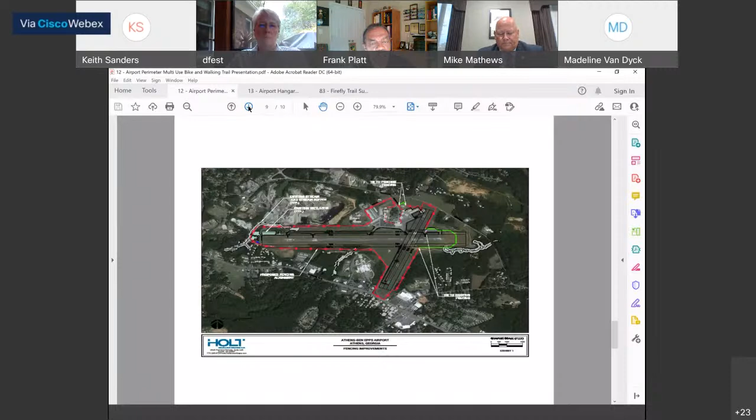Any questions? Thank you, Mike. Any questions from the committee? Please raise your hand. Andrea.

I have a couple questions. One is about the distance all the way around. Do you have the total distance that the trail would be? Yes, it's roughly about 24 to 27,000 linear feet.

Okay. And in the budget materials, I haven't reviewed all that before tonight, does it distinguish between the cost for what would essentially be double track adjacent to the fence and the cost of the fence itself? Say again? Does the budget differentiate in the construction cost between the cost of the fencing materials and the cost of construction of the double track?

No, this is just the track itself. The fencing materials would be taken care of in our fencing project with the FAA. So this cost I showed you has nothing to do with fencing whatsoever. It's just the track itself.

Jeff? Yeah, I have two questions. One, does the FAA really let you paint a sidewalk next to an active runway that looks like a runway?

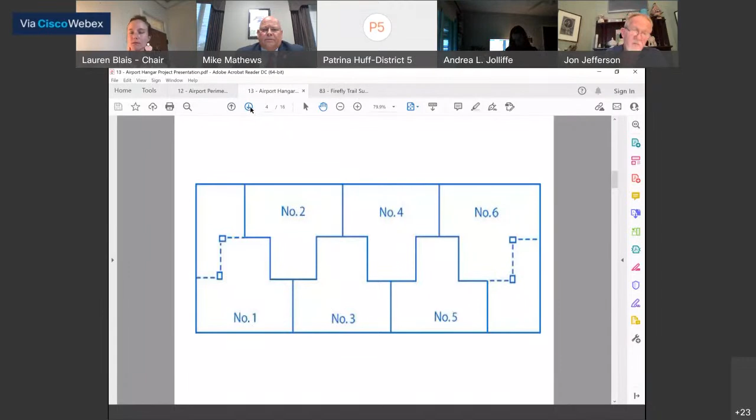When we talk about T hangars, this is what a T hangar looks like. They're in the shape of a T. The airplane's wings go in the larger section, and the tail section goes in the smaller section. This is what they call a nested T hangar.

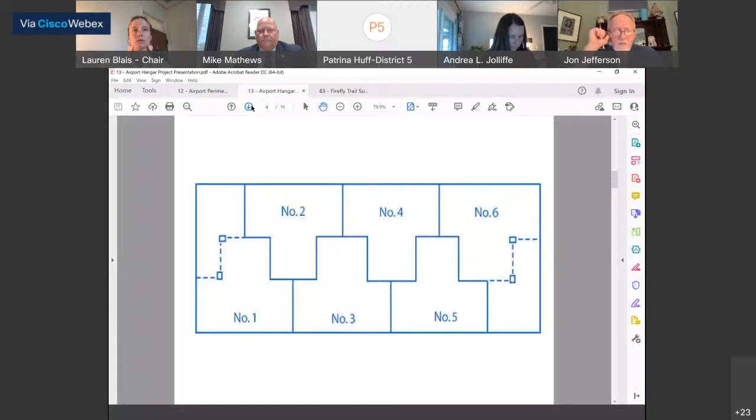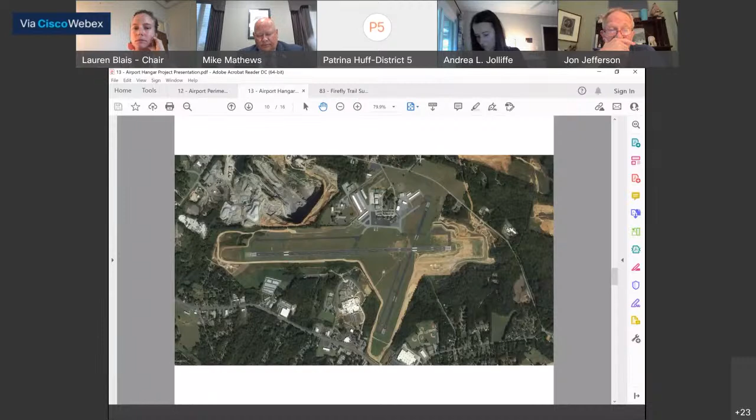This gives you an idea how we're laid out with our hangars. You see the rows - those are box or T hangars. They've got different designs, built in different years, and we have room for several more hangars to be built as well.

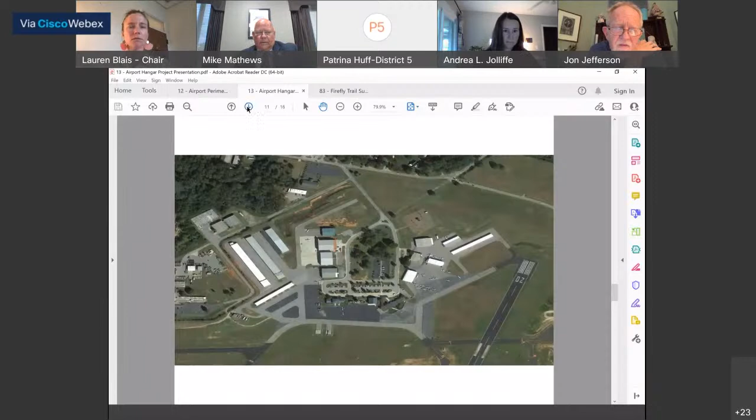So let me talk about the purpose of the project. The purpose is to bring additional revenue to the Athens-Clarke County General Fund and also the airport. The project will allow the airport to construct individual hangars used by based aircraft owners to rent from the airport for their aircraft. The project will add revenue through fuel sales, estimated about $75,000 annually, depending on the type of aircraft that goes in it.

The project will also add revenue to the Athens-Clarke County General Fund from local property tax. Again, depending on what kind of aircraft goes in it, it's estimated anywhere from $50,000 to $100,000 annually going into the general fund.

A lot of people think most all revenue comes back to the airport - our hangar rental, our fuel sales - because we're an enterprise fund. But one thing the FAA doesn't mandate is that property tax go back to the airport. Property tax at all airports, I believe, goes to the county or the city, which helps the general fund. Don't hold me to this, but I think it's somewhere in the neighborhood of $500,000 - I don't think it's over that yet - that's the total property tax that goes into the general fund from the airport annually. I may be a little off, up or down.

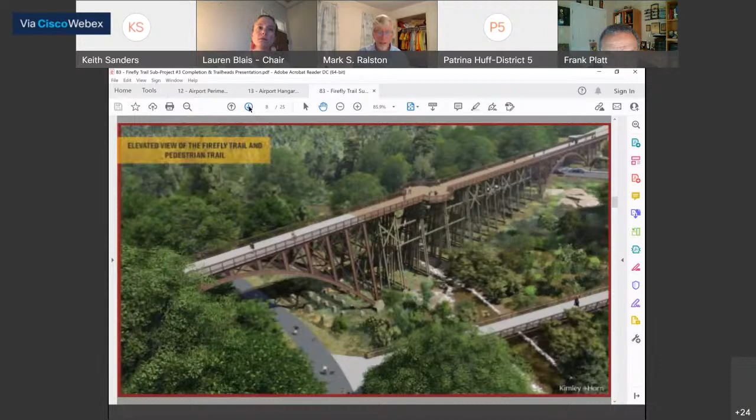The trail has a lot of benefits, and one of those is economic. An economic impact estimate from the Georgia Tech study, completed in 2016 for the Georgia Department of Transportation, showed that when all 39 miles are finished, the trail will attract about 1.13 million users a year and have a regional economic impact of about 14.7 million annually. Just construction alone will generate 158 jobs across our region, the study estimates.

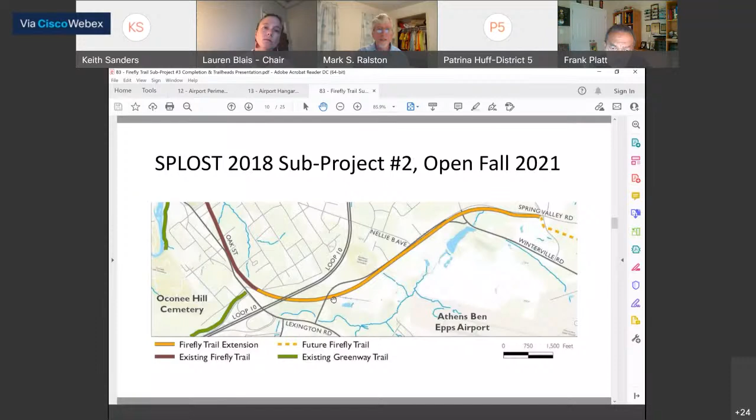Of course, for the full scope of the trail's benefits to be realized, the trail has to be completed. Illustrated in this map by the solid orange line is the trail segment that will open on October 1. This map shows the yet to be completed subproject 3, which is what we're here tonight about, extending some 3.4 miles from the intersection of Hancock Road and Spring Valley Road all the way to Winterville's 5 Points.

Although this was included in the SPLOST funds from 2018, this final trail segment faces a funding shortfall. The amount included in the previous SPLOST isn't enough to finish the trail, particularly not in the long-lasting concrete surface that voters expect, much less to develop facilities such as parking or restrooms, which are very important to trail users. Contributing to this gap are higher than expected costs on the Trail Creek Bridge, and also a bridge that had to be installed over a future access ramp from Lexington Road to Outer Loop 10.

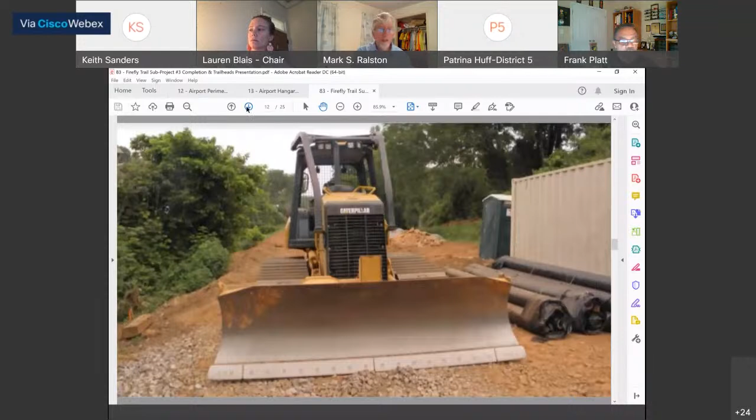Now, county leaders have committed to completing the trail. The question before the advisory committee is when. If funds aren't allocated from this TSPLOST, it will really be several years before the next TSPLOST or SPLOST might close the gap. During that time, the residents of our county just won't receive the trail's full health, safety, and recreational benefits.

This is a great view showing part of the newest trail segment, approaching Hancock Road along Spring Valley Road, near the Hallmark Mobile Home Park. Especially for nearby neighborhoods, the Firefly Trail promises to promote equity in health, safety, and infrastructure investment. But fulfilling that promise requires having full connectivity between Athens and Winterville. We think it's best to finish the trail now and realize its full potential sooner rather than later.

So as I touched on a moment ago, besides completing the trail, the proposal includes some necessary amenities. One of those will be this trailhead facility located adjacent to Ranick Road, as shown in the concept graphic here.

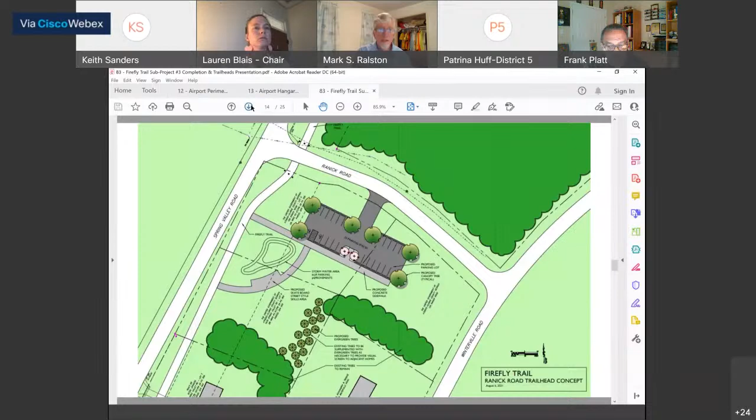And also here, which is at the intersection of Winterville Road and Spring Valley Roads, where the trail will connect to the future Rock Hill Quarry Park. That's Winterville Road on your left, and then making a right angle turn and going off to the right towards the airport.

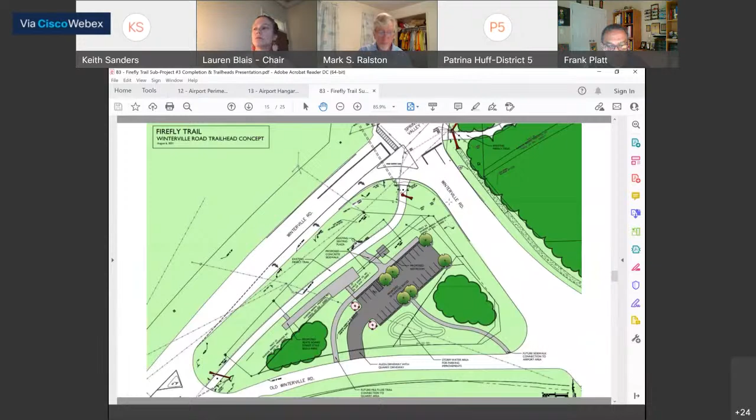Now the trailheads will include parking areas such as this example on the North Oconee River Greenway.

As well as restroom facilities. This is a new structure at Ben Burton Park.

We're also proposing to include a small skate skills area at each of the trailheads, similar to this example, which is at Vogel Creek Park in Texas. These kinds of areas will help diversify the Firefly Trail's user base.

Voters in the TSPLOST sales tax initiatives have made it clear that they expect the final segment to be completed with the same high quality, cost-effective concrete surface you see here. This has a life expectancy of about 50 years, which makes it an ideal surface for trails like this. Our community is making a huge investment in the Firefly Trail, and this public resource will return that investment many times over if we can maximize the number of people who are able to use it.

Without the TSPLOST funding, Athens-Clarke County might have to use crushed stone or compacted soils for many years in portions of this final section. While these surfaces are inexpensive initially, they require ongoing maintenance, which can be expensive over time. Otherwise, they wind up looking like this, and they're useful only to the most hardy and adventurous of trail users.

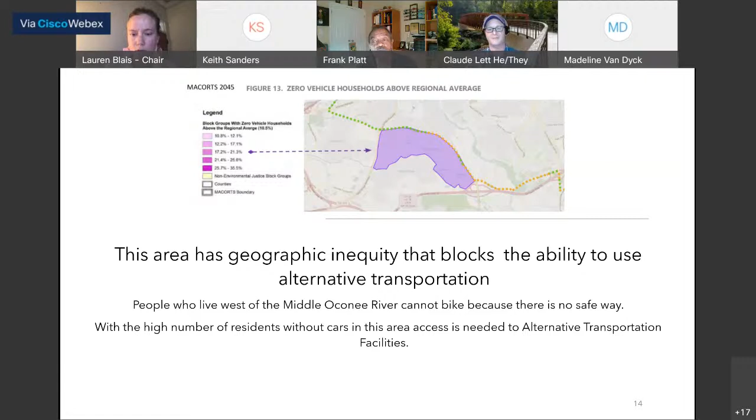I want to show this image again, of the 0 vehicle households above the regional average. Remember, no benefits of SPLOST or TSPLOST have ever been realized by this part of Athens. This bridge makes a big change in the equity of this area, giving these 0 vehicle families access to bus routes and more employment opportunities, because now they can get to the other side of the river to the Beechwood area and all the businesses over there. It increases their options significantly.

The 4,000 residents of the Timothy Road corridor gain access to public options across the river, such as the library and middle and senior high schools, so kids can walk or bike to school. There are also 5 major churches off of Timothy that would benefit, with members able to walk or bike to services or visit the historic landmarks we spoke about earlier. And when people use cars less with more activity in this area, that means fewer cars and less pollution.

Fewer cars then subsequently means better roads. More alternative transportation leads to less vehicle miles traveled and less traffic congestion, and one main reason is because this project reduces time spent traveling in vehicles. By providing a walking and biking option, you significantly lessen the automotive footprint. We've seen it over and over again.

This project turns a 5-mile drive, currently the only way to make the trip, into not only a short walk or bike trip from one neighborhood over the bridge to another, but also incentivizes walking or biking because of how easy it would be, by providing the destination for them to go to.

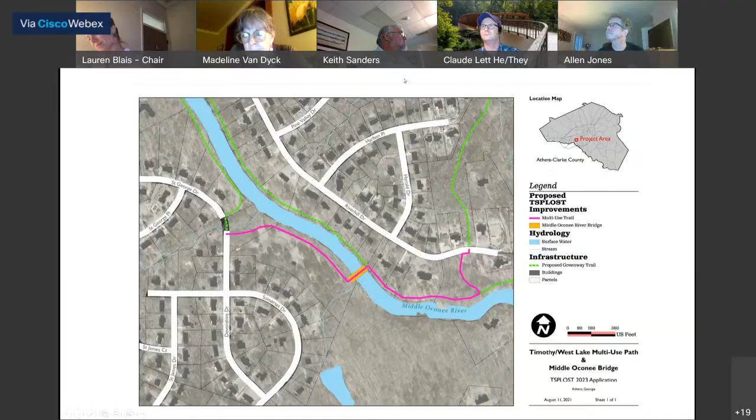Claude, given the existing infrastructure on both sides of the river, is there a temporizing bridge that would allow some beginning of flow across both sides that could be considered, or do we need to go full bore with metal and concrete? From what we understand, there were no alternative construction options we could be considering.

Allen or Keith, any thoughts on that? It's Allen, I'll jump in. We were approached to assist at one of our open houses with this project. We used the standards for Greenway trails to guide the pricing, and that's the bridge featured in the background on the screen, which has also been used a couple times. That's the standard we use for all of our trails, and it's probably about the least cost bridge for this area and length of span, to be able to get out of the river buffers with the foundations and have that long a span. It's actually one of the longest spanning pedestrian bridges in the area.

I believe, just out of curiosity from your map, where the bridge lands on the River Hill side, it lands on Athens-Clarke County owned property. Out of curiosity, why not take the trail right up to River Hill Drive? I think it was an ADA concern because of the rise of the land. Okay, I don't know the property at all. Again, the precise location could be changed. John, topography for that linear piece is very, very steep. Yeah, okay, that makes sense.

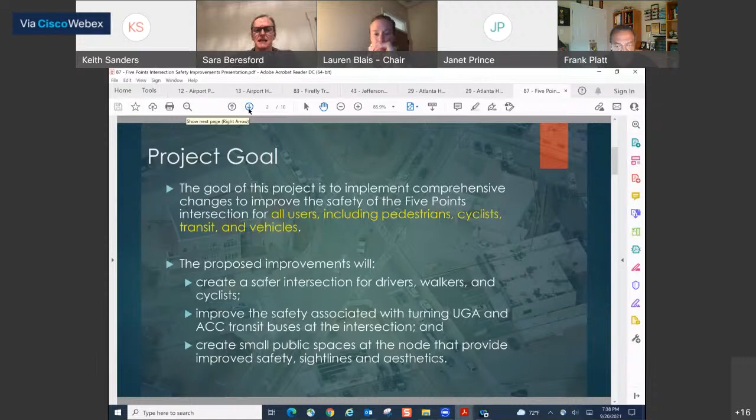So what does that actually mean? When we put this proposal together, we worked with a landscape architect to come up with a generalized set of drawings about what types of changes could be implemented to improve this intersection. So although I provide this sketch, it is by no means how this project would necessarily look. That would be something a user group would determine down the road. But this gives a general sense for the types of things that could happen, including relocating existing crosswalks to shorten and improve pedestrian walk time, converting existing strain poles to mast arms, improving pedestrian and wheelchair ramps, improving pedestrian refuges at corners, evaluating and improving curb radii at key corners of the intersection, updating signal control and timing, and overall aiming to reduce car, pedestrian, and bike conflict points. Next slide.

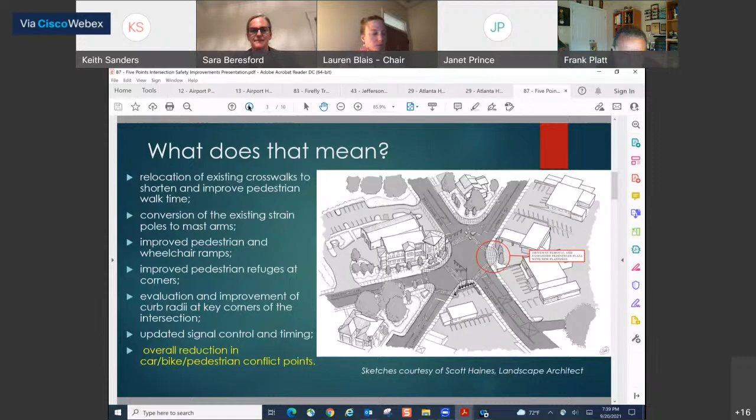So why is this important? Why this intersection? This intersection is a major hub of transportation and commercial activity with multimodal activity that serves all of Athens and surrounding communities. There are safety concerns, a lot of accidents, a lot of near misses that traffic data doesn't capture, a nearby school, and a high volume of UGA student drivers. As many of you use this intersection probably on a daily basis, you know it has terrible geometry, unusually long crosswalks, irregular abutting properties, and corners, driveways, and curb cuts that are inside the intersection itself. Next slide.

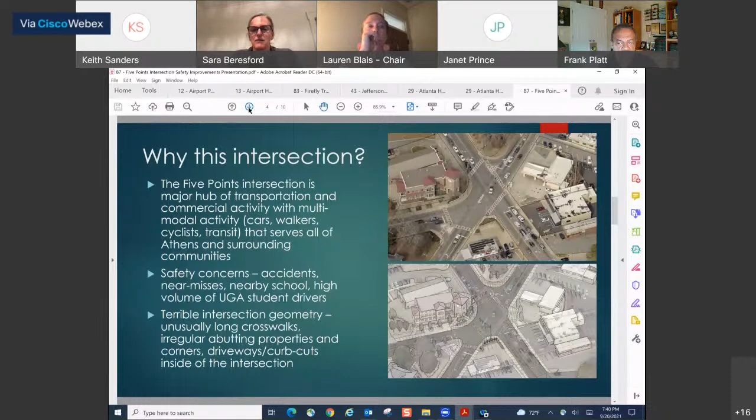So the larger picture of these types of intersections is that they're known to be difficult. Five-pointed intersections are notoriously challenging around the country, but some of the creative solutions other communities have used, like roundabouts or transforming the intersection, are not feasible due to existing buildings and infrastructure. We have the additional challenge that Milledge Avenue is a state highway.

The ACC Department of Transportation and Public Works has also identified this intersection as an area of concern and has already implemented some measures, such as signal timing adjustments, to improve safety. These proposed improvements are consistent with goals outlined in the Athens in Motion plan. Next slide.

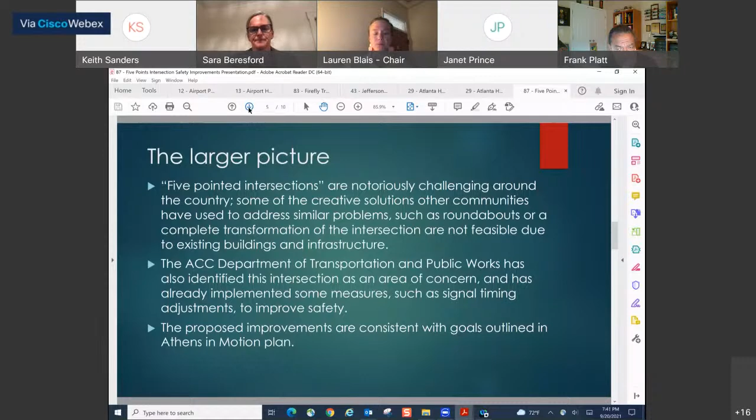So how does this proposal support TSPLOST program goals and selection criteria? First, the economic prosperity goal provides capital expenses needed to achieve planned action items. By improving the safety of this node, the proposed project helps Athens move towards several goals identified by Athens in Motion, including connectivity, equity, more users, and implementation, providing a variety of funding mechanisms to finance and maintain the network. It also touches on social well-being by improving safe and equitable access to public transportation facilities, including transit, crosswalks, sidewalks, and cyclists. And environment supports other transportation-related capital expenses needed to achieve action items identified in previously adopted plans. Next slide.

Specifically, this addresses the selection criteria, promoting the goal of improving equitability of capital improvements throughout the community by increasing safety and access for multiple modes of transportation for all users of an intersection that serves all of Athens. It promotes the upgrade and continued use of alternative transportation facilities with safer bike lanes, crosswalks, sidewalks, and transit access, and promotes health and safety, improving safety for pedestrians and cyclists in this area. Next slide.

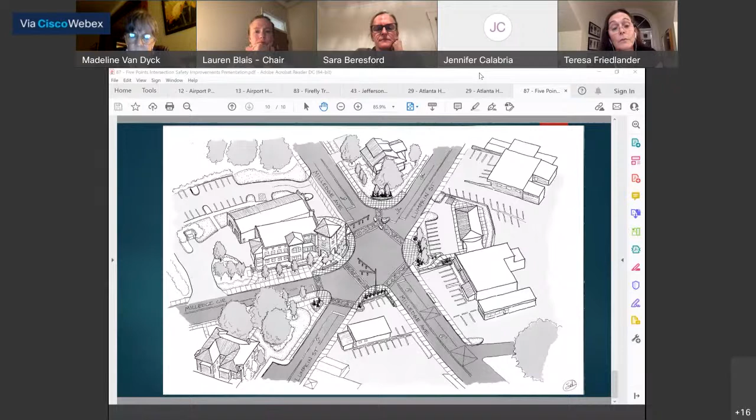I just want to share a couple of observations. Recently I've been going through that intersection a lot, and my biggest observation is that pedestrians are really scared to cross, even at the flashing beacon locations. They press the button, the thing starts flashing, and then they just hang back waiting until they think the car is coming or not going to kill them. That's an educational problem we need to solve countywide. But looking at traffic in that intersection, it's always congested—I haven't been through it one time when it hasn't been congested, and nothing moves fast. I don't see speeding as a problem here. I see the problem as elevating the status of the pedestrian and making pedestrians much more visible. I like how you've configured those crossings there. I think that's a better approach to getting people from point A to point B, and it eliminates those really long runs, which are terrible. So anyway, that's really all I wanted to say. I think it's a good project, and thank you for bringing it to us. Thank you.

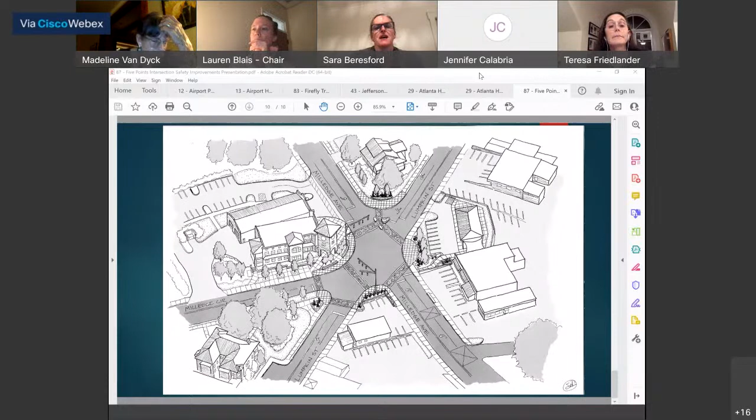This is a case where I've always felt congested traffic isn't necessarily bad from a non-car user standpoint. The cars aren't going that slowly, but visibility is the real issue. What the sketch doesn't capture well is the Lumpkin rise—if you're driving on Lumpkin coming from the UGA track, and catch it when there's not much traffic, visibility is really poor. The way you cross the 5 Points intersection on Lumpkin Street is sketchy for all users, especially with any speed involved. But yeah, it's all about visibility.

We have a challenge in Athens in general. You mentioned the education piece, which I think is really important. I have one teenage driver in my house and another on the way, and I always tell them: remember, we get about 10,000 freshmen every year coming to this town driving their cars. That's a lot of teenage drivers we're adding. So that makes the education piece challenging, because you have a lot of young and distracted drivers. So texting, yes.

I was recently rear-ended at this intersection, and I've also been in a bike wreck here where I clipped my bike pedal on the curb at the Golden Pantry. But it was great because two weeks later there was an apron there, so it's now flush and my problem was solved. That never happens in transportation world, where two weeks later your problem's solved. I was fine, just embarrassed because I fell in the middle of 5 Points.

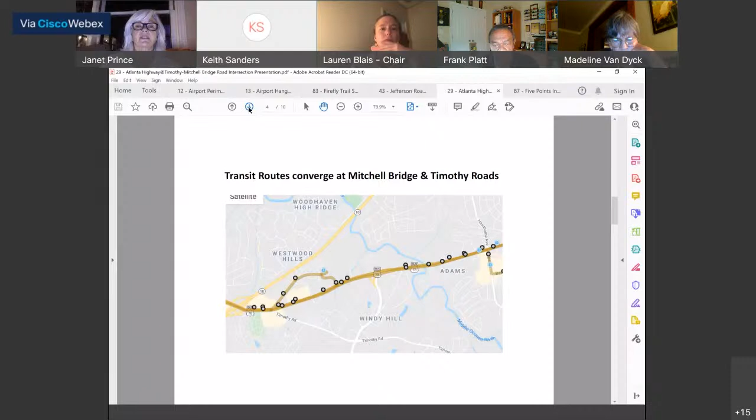Let's see, is that the last one, Keith, or you can go to next? Yeah, just talking about how dangerous it is. You guys can see where the majority of the wrecks are.

And even where the Chick-fil-A is, if you come out of the Chick-fil-A, that whole situation there, it just all converges into that main intersection right there. And it's just really dangerous to me. There's just a whole lot going on.

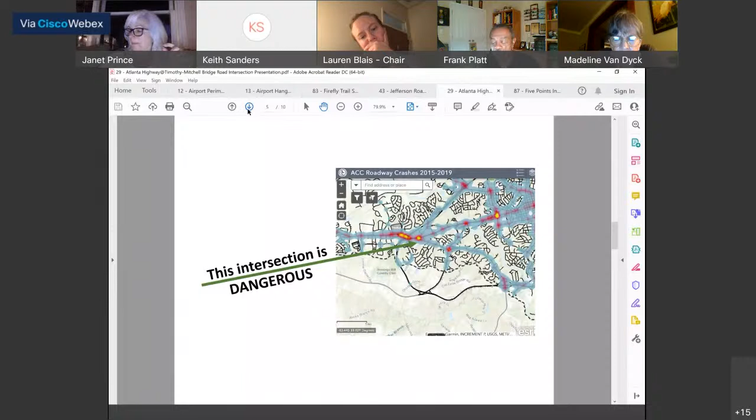So that's from the Wells Fargo going out of town and the Atlanta highway. And then I think there should be a picture of the gas station there, Keith, or we're not quite to it yet, but you can see the crosswalks. It's just showing you, yeah, there's the gas station there.

So right here, that's this gas station, and that is now vacant. And I believe that can be purchased.

And that would mean this is Mitchell Bridge here, instead of Mitchell Bridge coming and doing this big hook sort of curve, and where all this congestion is here, it might be possible then to bring it just straight across. So there'd be a better sight line, or perhaps like we were talking earlier, some other kind of configuration.

Maybe like a roundabout. That'd be a lot of cars there, but major cities do have them where there's a lot of traffic. And I don't know the answer to that, but this is the former fire station. So we could cut through there and then work right through where this vacant gas station is.

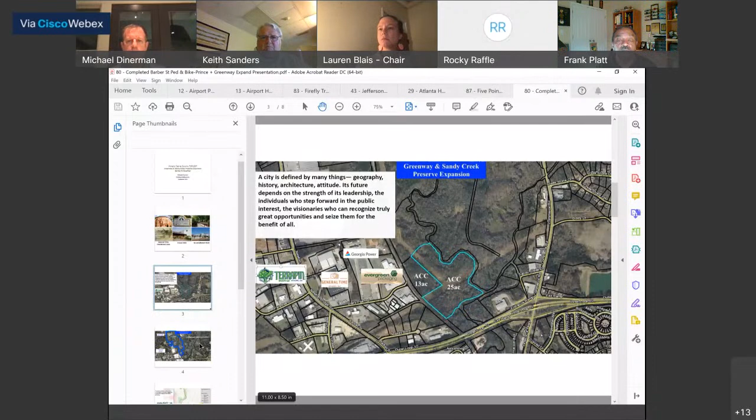If you'll go to the next slide, I'll tell you about another encounter I had with then Commissioner Kelly Girtz. After meeting at General Time, Kelly walked us to the parcels ACC already owns there on the railroad tracks. Mayor Girtz said, can you imagine, and I've heard this phrase used a number of times tonight, the word game changer. Can you imagine what a game changer it would be if the youth and families of Athens could get on the Greenway at any point and have a full loop so they can access the recreational fields at Holland Youth Sports Complex, which actually got sidewalks thanks to the last work you guys did at TSPLOST.

So the story isn't really about General Time. The story is about a whole section, at this 12 o'clock on the dial part of Athens, that has had limited access to goods, services, and recreation. Across the nation, you see communities and parts of towns like this separated by highways, which the loop has done. At one point, there were sidewalks planned to come down Chase, but that didn't work out. I think sidewalks coming straight from downtown, down Barber, will actually create a more diverse economy and population, especially if you look at a hub and spoke concept including areas around downtown. So if you can go to the next slide.

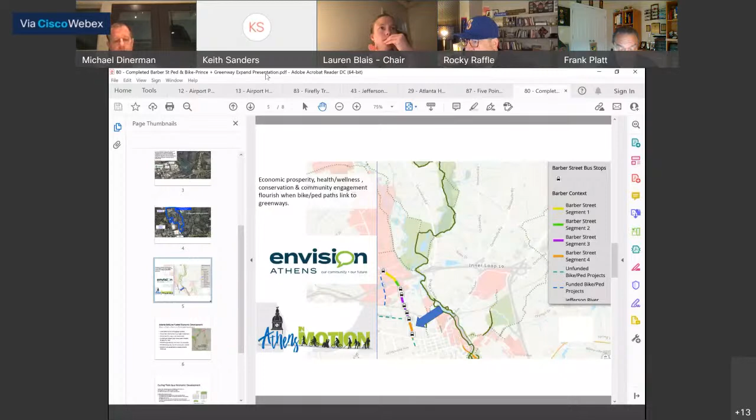So Atlanta often comes to mind when you talk about trails and connectivity and greenways. And a big part of Ryan Gravel's thesis—Ryan, the founder who conceived the Beltline while he was at Georgia Tech—a big part of it is referred to as the Emerald Necklace. So you see the series of parks around the Beltline. That's really what has had the major impact, because you get companies that want to come to places that have this kind of connectivity.

And I think that when you look at a lot of the projects that will submit on your list, and there've been some fantastic presentations, you know, when you get to there's going to be less traffic, cleaner air, more usage, the mental health benefits, the connectivity—we all check all those boxes. It's really looking at a map and seeing what's going to have the biggest impact.

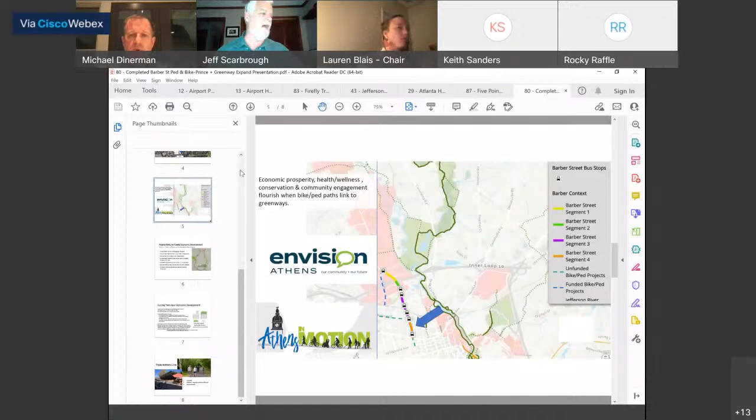I'm not familiar with one of the Barber Street projects mentioned here. So the Barber Street project is independent. The transportation services will be presenting in the next session. I guess they haven't yet. And then the idea is that trail, the Barber Street pedestrian access, comes right to where General Time is. Right, and it's full inception.

Now, if it's not completed and it's full inception, then really what you've done, if you did sections 3 and 4, is there will be a stop. And then we have mandated sidewalks all the way down Newton Bridge Road and all the way down Dairy Pak. So essentially it would be creating more problems than solutions, because you'd be telling people, oh, you can get on it downtown, but then you have to stop and you're not going to have bike and pedestrian access. But then when you get to General Time, you will. So that's one aspect of it.

And then here, what I'm asking for, proposing, is this additional acquisition of acreage to the north that would connect the ball fields and expand the greenway.

So the trails that we're doing on property are recreational trails, in terms of mountain biking. And then we have mandated multimodal sidewalks running north, south, east, and west on our property per our planned development approval. So you're talking about taking that property out of an industrial park usage and making it recreational?

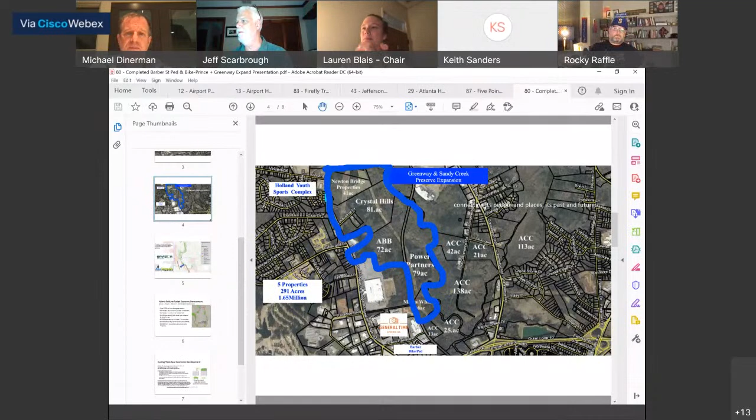I am really drawn to ideas like the Atlanta Beltline and this idea of connecting businesses in that area. I think that is sorely needed. What I'm finding, and it's more maybe a comment for the committee to think about, is that with something like a Beltline, there's this whole neighborhood, say where I'm from, or Rolling Ridge or something, where people might want to bike, but there's this whole disconnect. So even before you get to quote the Beltline, or our version of the Beltline, our Barber Street line, there are going to be things that disconnect certain people.

It's just something to keep in mind, because I see this happening, that it sounds like it's connecting people to businesses, but there isn't. The street that feeds into Barber Street has a lot of not well-off people, and even further back, like Jefferson Road, we just heard a project that cuts us off from a location that's close by, with places that seem nice to work and are within biking distance. So there's all kinds of barriers or breaks on the path to getting to your destination. It's just a comment that it sounds like a connection, but it's not a connection.